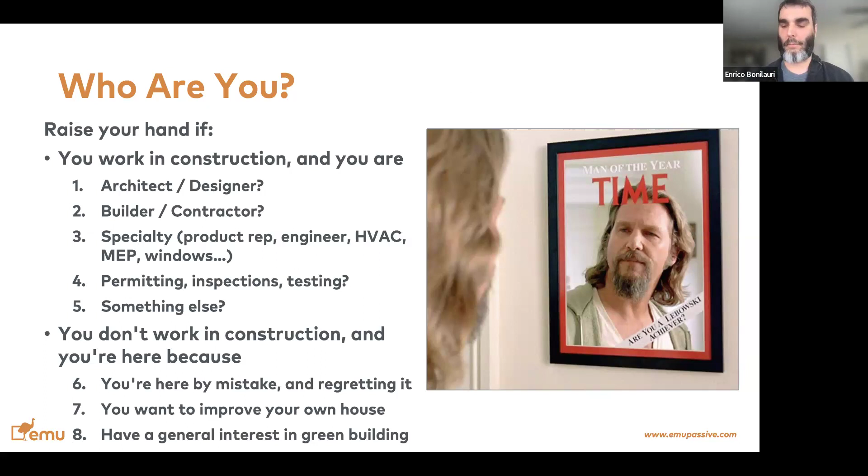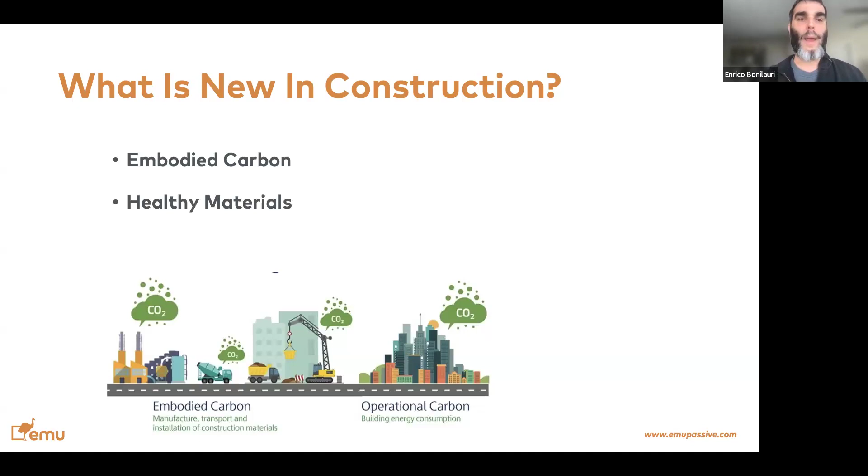So what is new in construction these days? If you've been following the news in construction, you've probably heard a lot about embodied carbon. You may have heard about healthy materials - there's new courses and new research done in materials and toxicity and how that impacts human health.

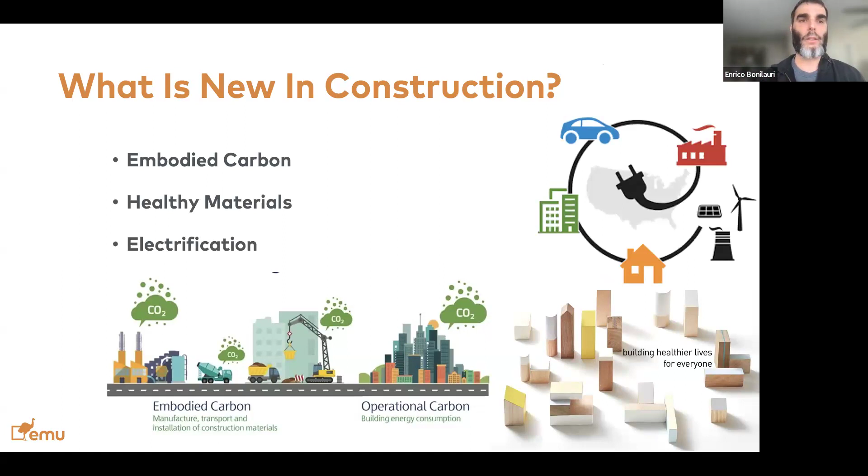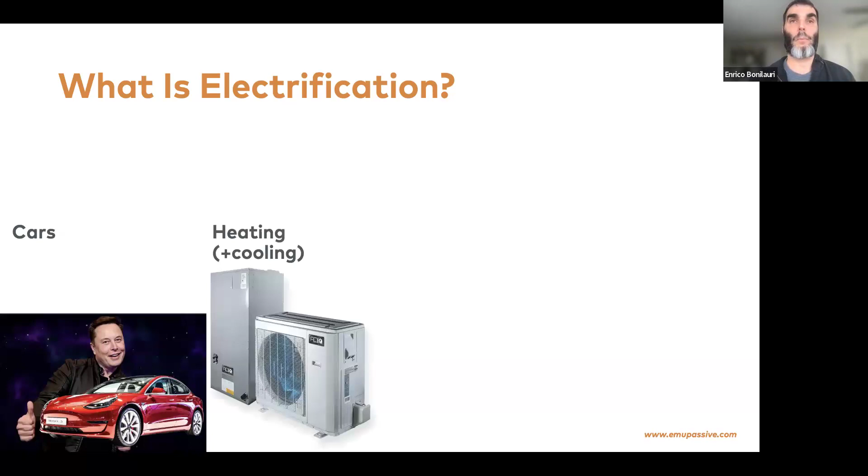As well as electrification. Electrification is bringing not just buildings, but also vehicles and other industries towards the one vector of electricity. And today we're going to talk more about electrification. What is electrification? I just mentioned that cars are becoming electric. Your heating system may be becoming electric, as well as your cooking or your domestic hot water. So why do we care about electrification? Any idea, any thoughts about that?

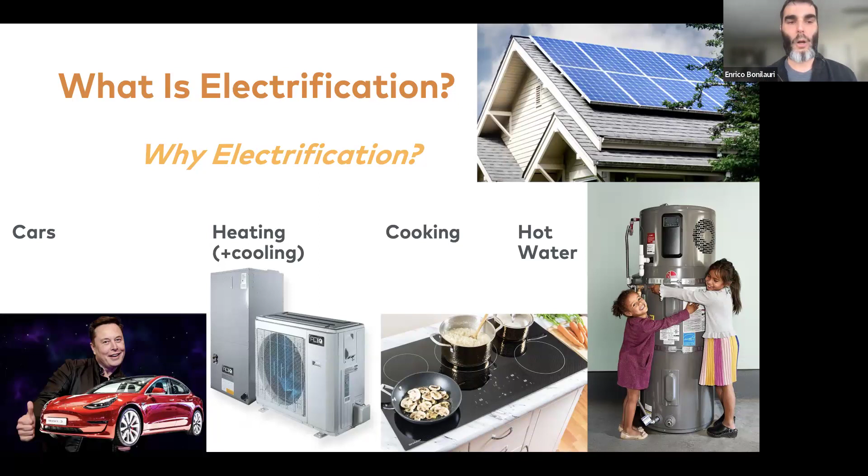In teaching, I've learned the value of open-ended questions. And one of the main reasons why we care about electrification is because if we electrify our buildings and our vehicles, then we can use renewable energy and move away from fossil fuels. So that is one of the main reasons why there's so much push towards electrification, not just in construction, but also in cooking, in cars, and other sectors of our lives.

So raise your hand, or put an X or whatever in the chat, if you own a heat pump. Do you own a heat pump? Please put an X or raise your hand in the chat.

Let me see, we have a few questions. So for those who answered no, do you own a fridge?

Because a fridge is a heat pump. We make this analogy just to remove some of the fear around heat pumps that a lot of builders as well as owners have about this new technology, which is actually not new. If you think of a fridge, it has a compressor that steals heat from inside the fridge and dumps it to the back of the fridge. That phenomenon is called the heat pump.

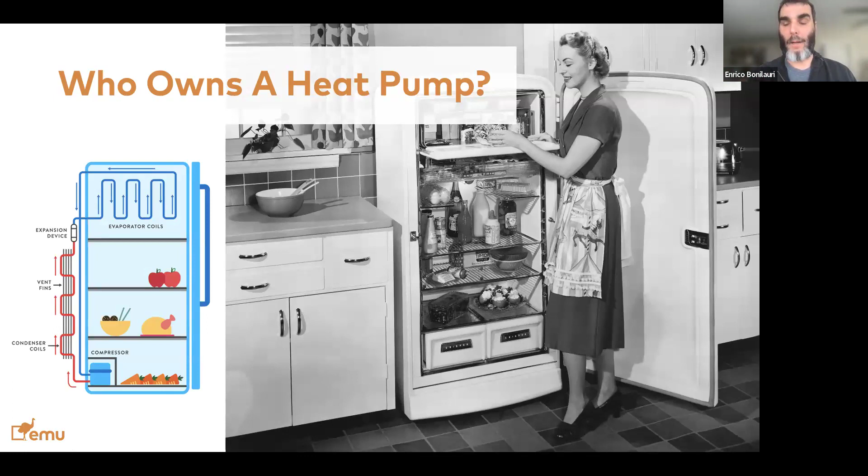So when we have buildings, we have a device similar to the fridge, a compressor that takes heat from the exterior air when it is heating season and dumps it to the inside to provide heating. And we care about that.

So imagine you give $1 to Joe, and Joe gives you $2, $3, or $4 back for the $1. It's a good deal, so it's a very efficient system because it provides you with more energy than what you supply it with. And that energy comes from the exterior air for an air source heat pump, comes from the ground for a ground source heat pump, or comes from the room the heat pump is installed in, in the case of the heat pump water heater.

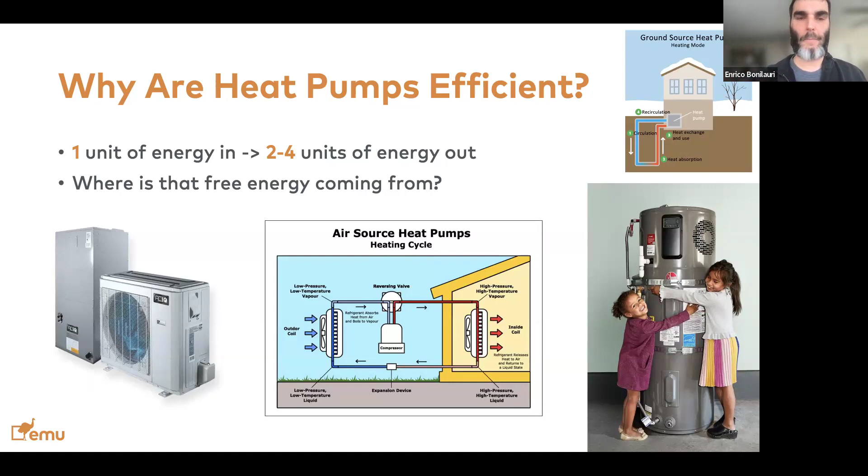So just looking at prioritizing your effort, it's always important to not neglect the efficiency of the building envelope, so the level of insulation, air sealing, and windows, because even if we switch to heat pumps, they are not that efficient in producing heating. They are more efficient in producing cooling. So that is something to keep in mind.

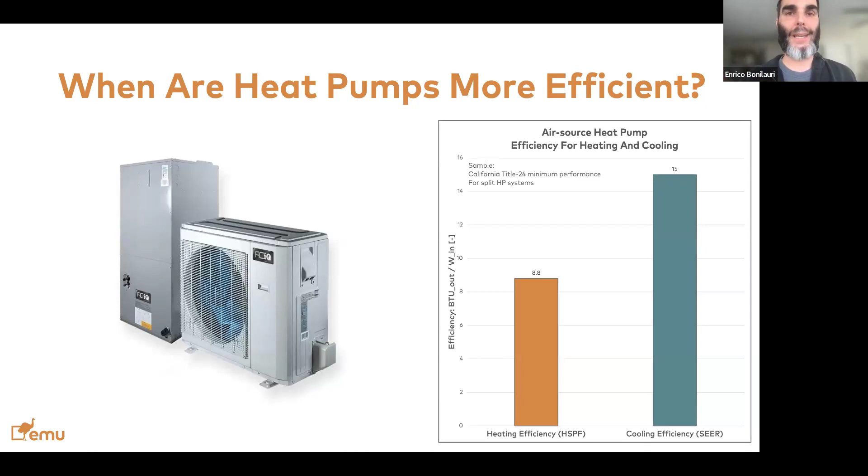In life, I really care about the time of day you run your toaster. That's a joke, but it's also not a joke, because in using renewables, the time of day we use energy becomes more sensitive.

If you're trying to offset your energy to get to net zero in an all-electric scenario, your heat pump producing cooling is working during the day at the same time your PV system is producing electricity, which is a very convenient deal. Whereas in wintertime, your heat pump has to work producing heating, which is less efficient than producing cooling, and it does that at night. There is no sun at night, so if you have PVs on your roof, they are not active at night.

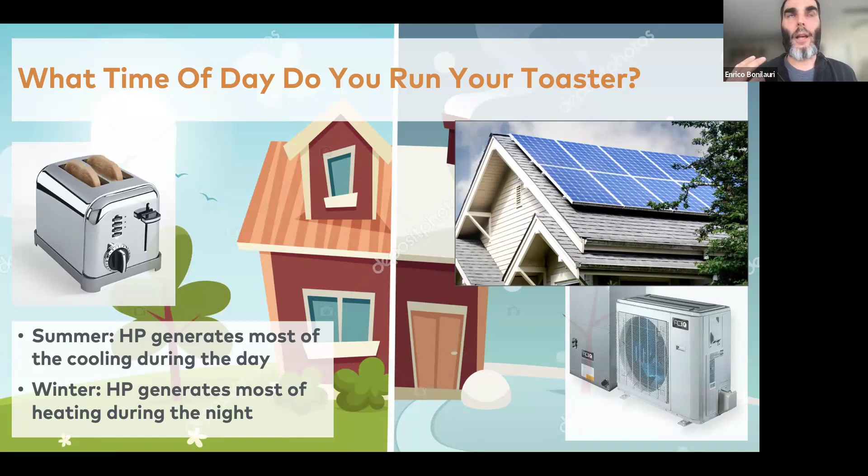So in trying to be smart about getting to net zero, you want to factor this in, because if you don't, you end up using a lot of electricity from the grid, and the grid is very carbon intensive across the country. You may have the perception of doing an awesome job because you've switched to a heat pump, but you're actually drawing a lot more electricity during the night in wintertime, and getting a lot more carbon-intensive electricity from your grid.

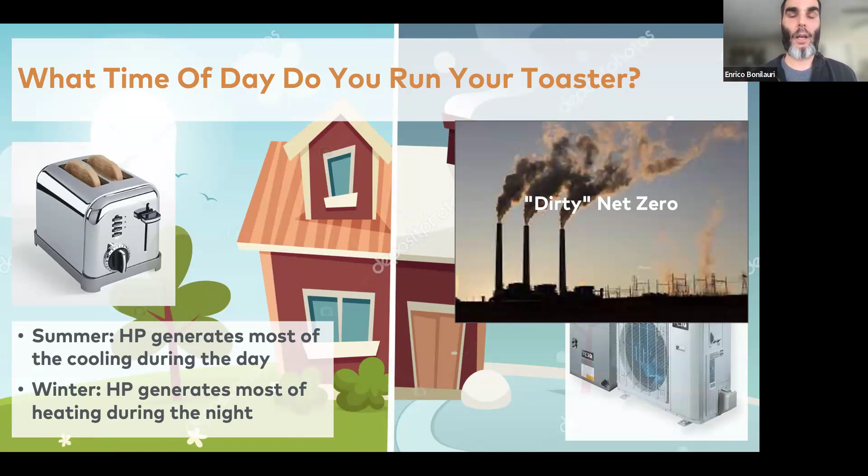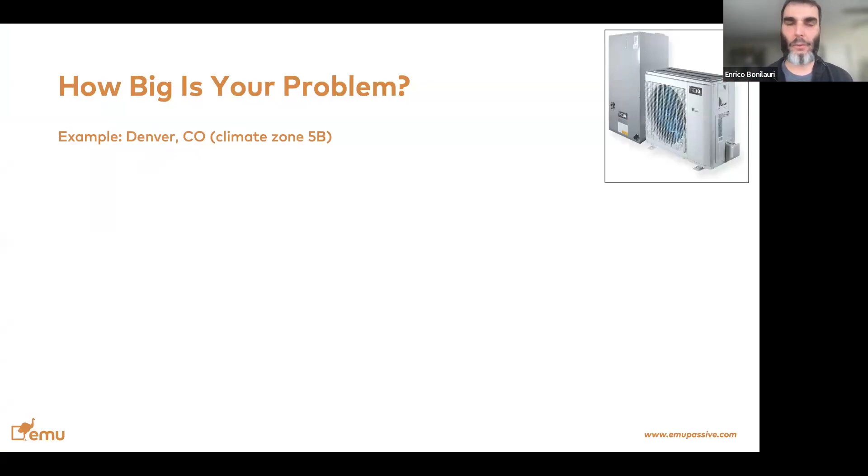Playing more on that, I put together a couple of examples based in Denver, a pretty similar climate—clearly more dry, but temperature-wise similar to Boston. This is an example of a new construction house. This is actually a passive house, but I'm just using it as an example of new construction.

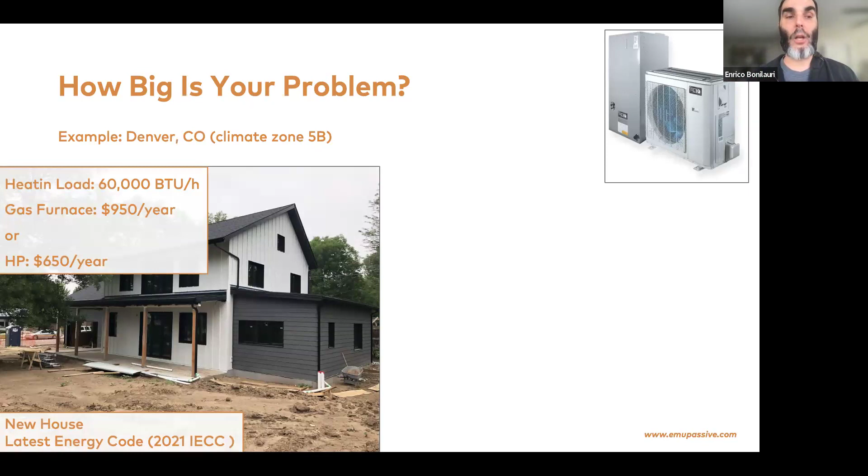If this is built to the latest energy code instead of passive house, the heating load is about 60,000 BTU per hour. To cover that in a typical year with a gas furnace will be about $900 to $1,000 in Denver with Denver energy prices, whereas with a heat pump, it's about $600 or $700 a year. So you save some money just switching from natural gas to a heat pump.

In a retrofit—this is actually a passive house retrofit project, but we're using it as an example of an existing building, a 1980s house with zero improvement to the envelope—if you're just switching to a heat pump, your heating load is about 250,000 BTUs per hour. Heating that with a gas furnace is about $2,800 to $3,000 a year, whereas with a heat pump, you save about $1,000 a year because the heat pump is more efficient.

So this is a normal scenario in climate zone 5, Denver: new construction built to the regular 2021 energy code, as opposed to the existing building from the 80s without any improvement to the windows or additional insulation, just as is, switching from a gas furnace to a heat pump.

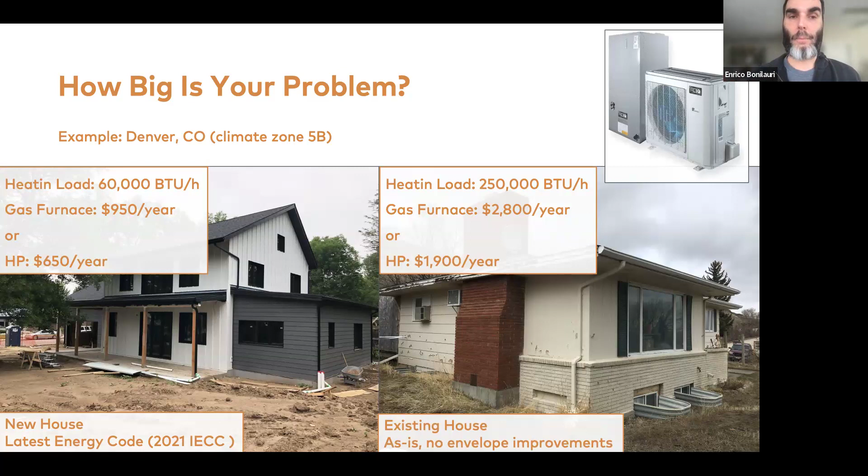Now, the problem is much bigger when you have extreme weather events. In Denver this year, we had a polar vortex where for 84 consecutive hours, Denver was below zero. For those not familiar with Denver, that very rarely happens—it's pretty sunny, it may drop down to 10 degrees, but 84 consecutive hours is pretty extreme. That put a lot of heat pumps out of order. One of the issues with heat pumps is that we're talking about air source heat pumps.

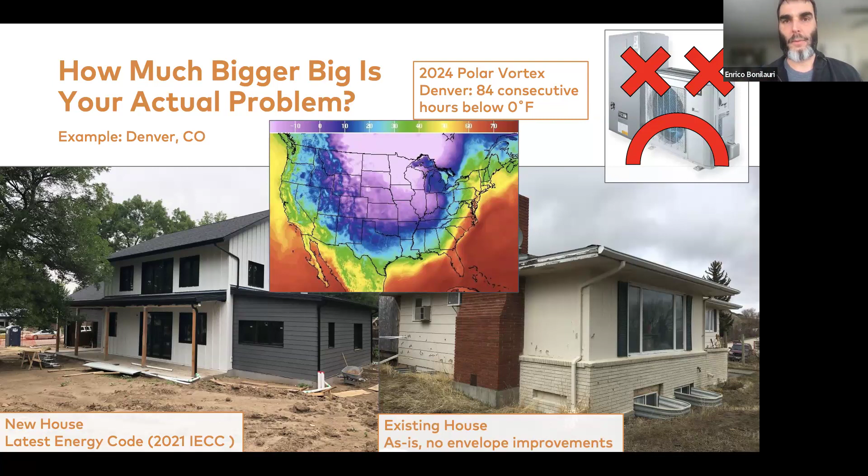It takes heat from the exterior air, and if that exterior air is too cold, then that heat pump cannot work. Now, there are some cold climate heat pumps, and you want to be very cautious about selecting a good one, because there are also a lot of supposedly cold climate heat pumps that are not high performance.

So they shut off or they become very inefficient. And when they shut off, the alternative is to have either a furnace, a regular furnace backup, which is probably most cost effective, or as we're showing in this case, a full electric backup—just a big electric resistance in your ductwork to heat up that air instead of the heat pump.

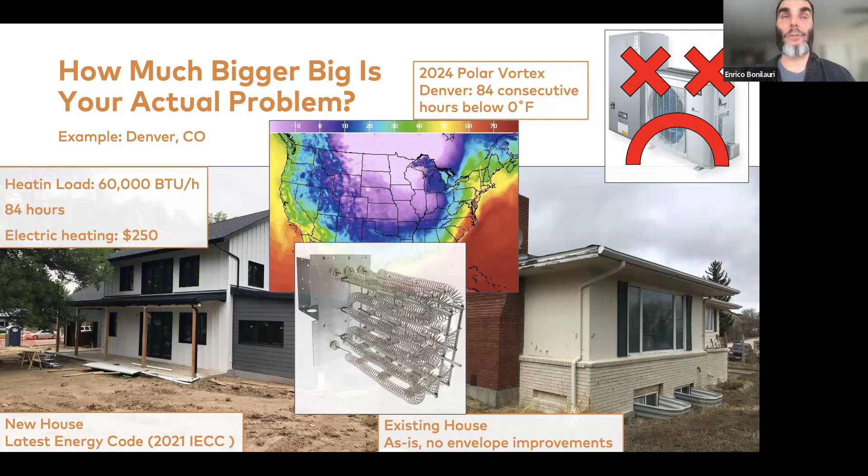And if you do that for a new house, over just 84 hours, it's going to be about $200 or $300 of extra electricity bills because an electric resistance is very inefficient. And for a regular house, 1980s, no improvement on windows or insulation, if you're switching to electric resistance heating, over 84 hours only, it can be $1,000 of additional energy bill.

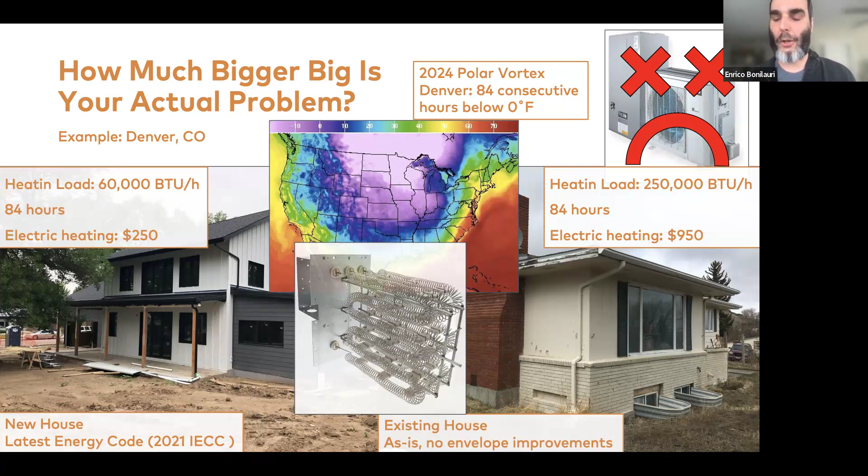So this is something you want to be very cautious about, because if you're switching to all electric, you want to make sure your heat pump actually can endure cold temperatures. Otherwise, you're exposing yourself to being either out of heating or having very expensive energy bills. This is just to put some cautions in your action moving towards all electric.

Then what is next in construction? We talked about electrification, we talked about healthy buildings, we talked about embodied carbon. And actually what I see next in the context of construction is this guy trying to sell us electric cars.

We are living in one economy with one grid and one market. So the fact that electric vehicles are becoming more and more popular is something that is going to impact the construction industry as much as other sectors. And we care about that because there's going to be one energy bill, and this is going to be our lives in the next 5 to 10 years.

So how does an EV compare to a house in terms of energy consumption? Have you ever tried to ask that or find that out?

By the way, in the newest and latest definition of net zero building, the charging of electric vehicles at home does fall under the umbrella of the energy that you have to offset for your building to be called a net zero building. So moving forward, if your city requires buildings to be net zero, it is on the horizon for that net zero balance to also include charging of electric vehicles. So that is something we need to keep in mind, because it's coming. It may be 5 years out, but this is the direction the whole market is going.

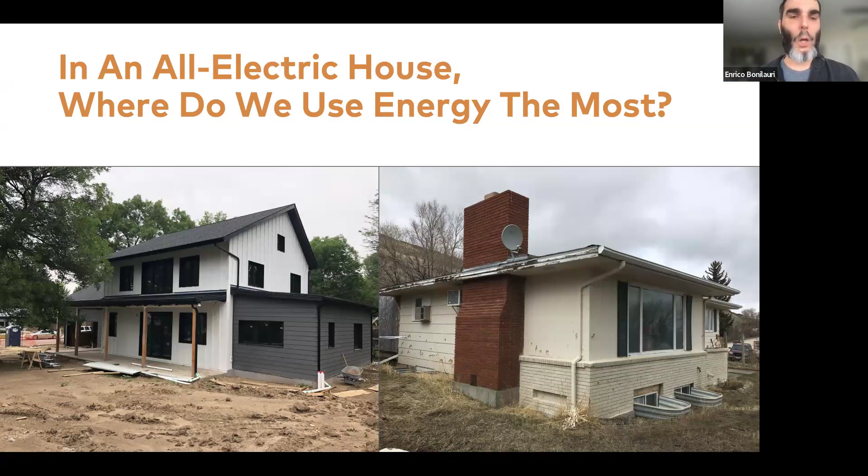So we looked at the new house, 2021 code compliant, on the left, and the regular house without any improvements. We did a breakdown for the as-is, and on the left-hand side, the new build, 2/3 of the energy—the solid orange—is actually the heating. The 3.9%, the dashed white and yellow line, is the additional heating due to the heat pump water heater—the water heater that takes heat from inside the room. And that heat comes from somewhere, and that comes from the heating system.

So this is a line of caution for anyone installing a heat pump water heater: that heating is coming from your heating system. That heat pump water heater becomes just an extension of your heating system. If your existing heating system is not that efficient, your energy bill is going to go up.

Then looking at the breakdown, about 1% is active cooling, about 6 to 7% is domestic hot water, and about 20% is appliances, home appliances, for the new construction. On the right-hand side, we have a similar breakdown, but because it's an existing home, about 75 to 80% is actually heating.

Now, if we look at these, they're just percentages. If we look at the actual numbers, this is what it looks like. So an existing house requires a lot more heating than a new house. Although you'd be surprised how much less energy you can avoid by actually doing much better than code minimum—we're going to talk about that later.

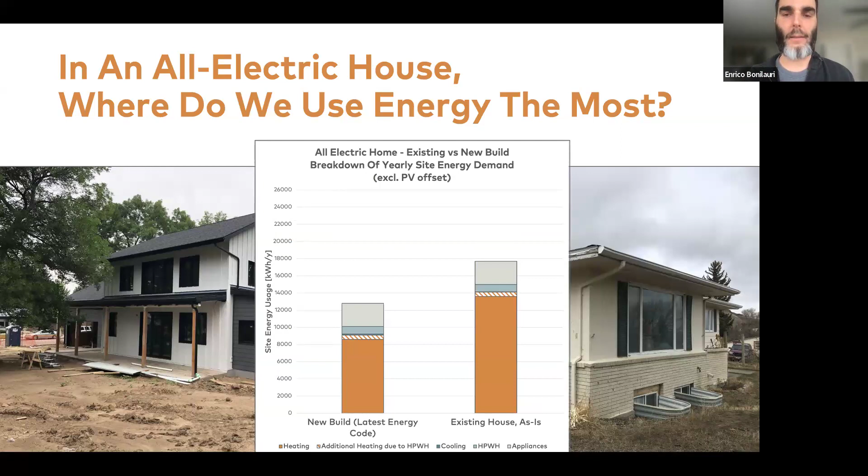Now, what happens when we start adding 2 electric vehicles per house?

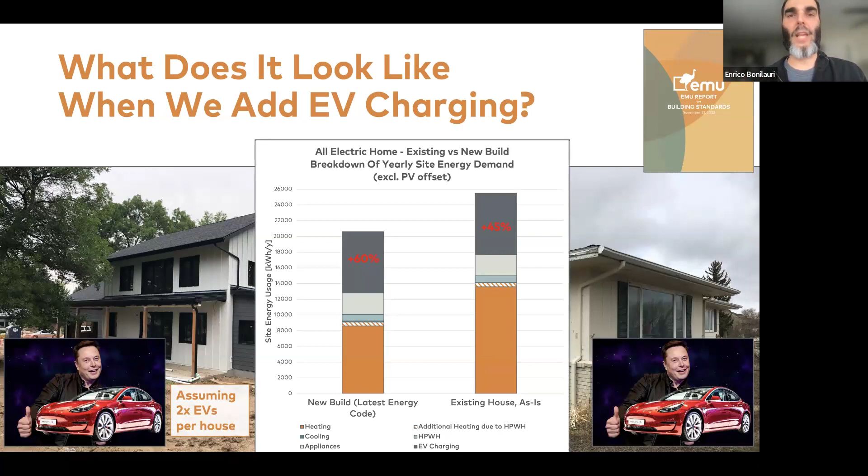Elon here comes to our door and tries to sell us electric cars. Now that energy bill goes up significantly. So this is something we want to keep in mind because this is coming, maybe 5 years out, but this is the direction the whole market is going.

How much PV can you install on your site, either on your roof or in your garden, if your goal or requirement is to get to net zero? There is a limit in how much we can offset the energy we consume at home once we start accounting for electric vehicles on top of buildings. This is something we want to keep in mind when advising our clients.

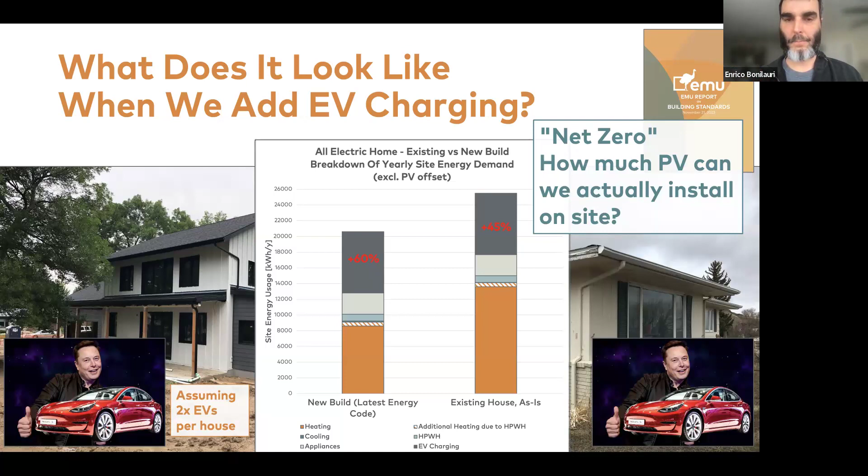Now, how much better or more efficient can we make electric vehicles or buildings compared to today's minimum requirement? Have you ever asked yourself that? I looked into today's EVs and tried to look into tomorrow's EVs, and I didn't find much information about how the technology can be better.

I'm not talking about batteries or how much longer the range can be. I'm talking about how many miles we can get from a kilowatt hour. At the end of the day, with EVs we are moving tons of steel, and that is not efficient to begin with. So unless we start building cars out of carbon fiber or something that doesn't weigh 2 tons, I don't see a ton of improvement in the mileage we get from EVs.

I also did not find much data as far as what is coming next. There's a lot of focus on batteries, but a little less as far as miles per kilowatt hour.

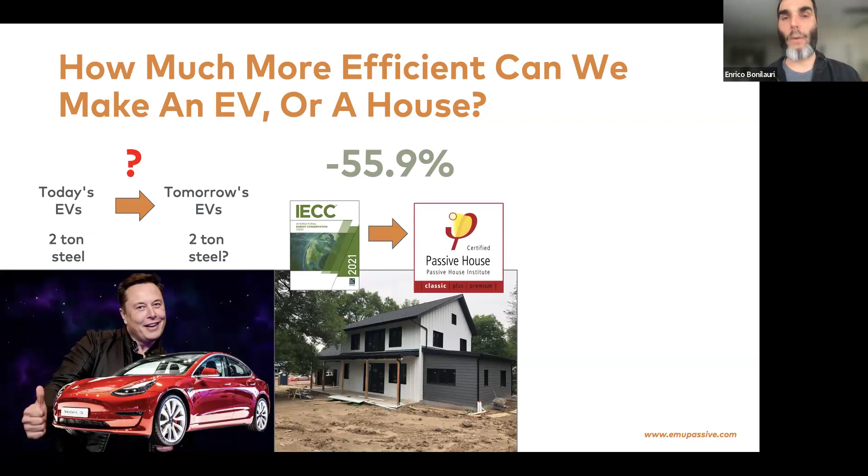Now, for new construction compared to the baseline code, you can reduce the overall site energy demand by over 50% by switching to passive house. This is not just heating and cooling, this is for the overall demand. And for the existing building stock, this is actually our project being retrofitted as an EnerPHit, that can be up to 60% plus. Again, this 55 and 60% is looking at the total site energy demand for domestic hot water, appliances, heating, cooling, and electric vehicles. Once you implement passive house or EnerPHit, you can save up to 50 or 60% compared to the regular building stock.

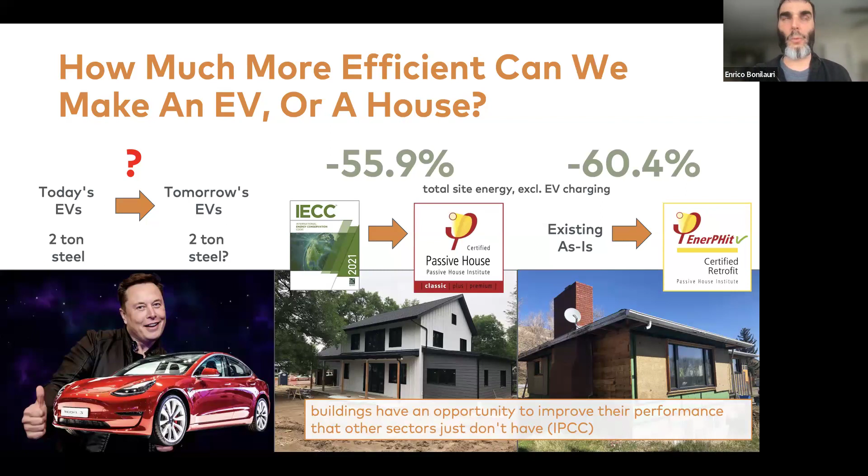One note that came from the Intergovernmental Panel on Climate Change for the construction industry, from the conference in China in 2019, is that the construction industry has dramatically higher potential for improvement compared to other sectors, including transportation and food production. So it's really key for our development as a society that we make buildings better, not just by switching to PVs and heat pumps, but by making them better insulated, better airtight, and with better windows and doors. That is one of the biggest potentials we have as the construction industry.

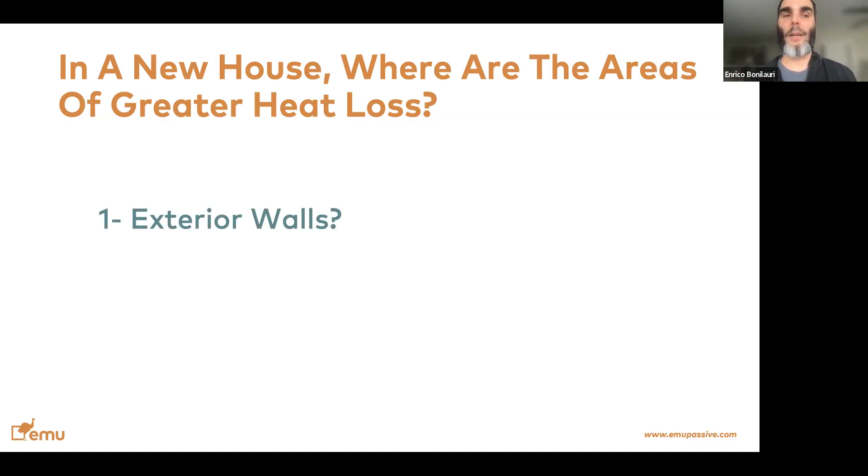Now, we talked about heating being the biggest part for both new construction and existing buildings. Where do you think the greatest areas for heat losses are in a building? This is where I'd like you to type in the chat, so please pay attention. If you believe exterior walls are the greatest source of heat losses, type 1. If you believe the ceiling or roof is the greatest area, type 2.

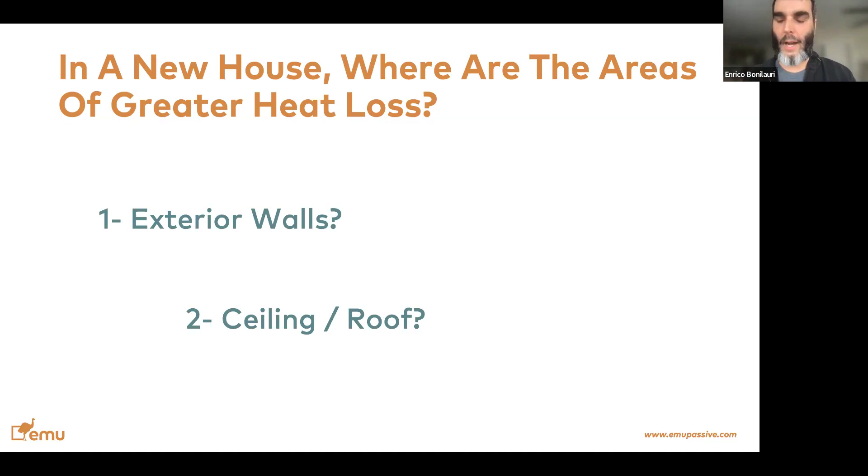Yes, there are considerations about whether it's a two-story building or a ranch—don't care. If you believe the walls are the greatest, type 1. If you believe the ceilings and roof are the greatest area of heat losses, type 2. Air leakage, if you believe that's the greatest area of loss, type 3. Windows and exterior doors, type 4. Doggy doors, type 5 — I am not judging, we have many clients who want efficient doggy doors, we can talk about that, and about unrealistic expectations. Or slab and losses through the ground, type 6.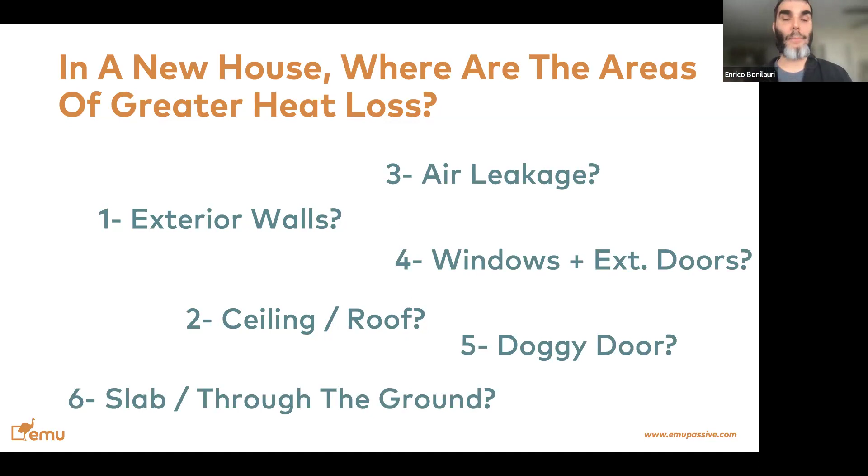This is the choice, you can type different numbers if you'd like, but this is where I try to get the sense. So we get some, let me see — air leakage seems to be popular, doggy door doesn't seem to be. If you saw a doggy door you would type 5 in a heartbeat. Mail slot, I would use that in the next one. Thank you, Steve.

Good, thank you for the feedback. We can talk more about that in a second. And I don't know, because I don't know which buildings we're talking about.

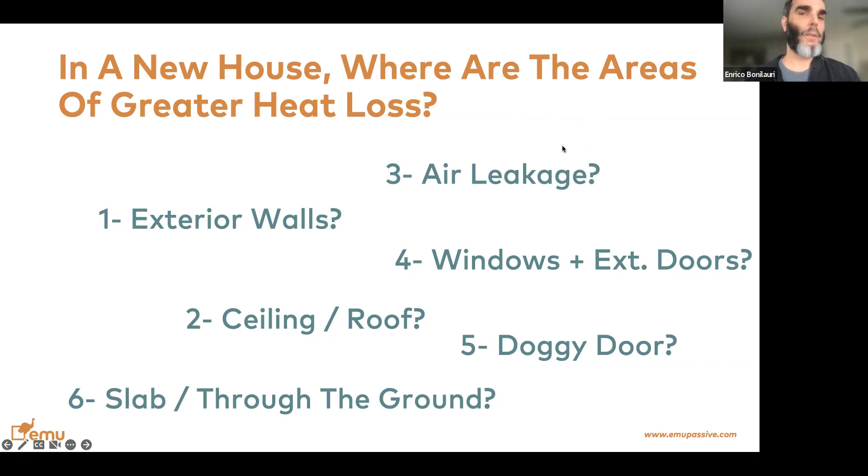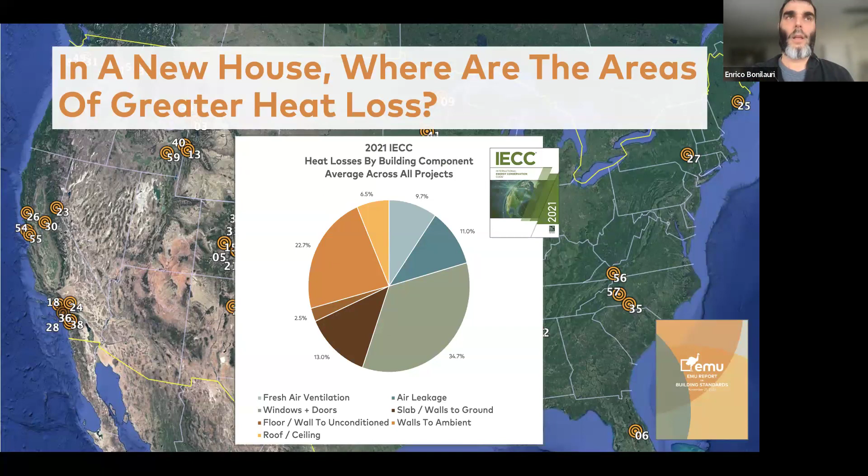To answer that question, we developed a study, available for free download — there's a QR code at the end of this presentation if you're interested — where we looked at 50 different single-family projects across different climate zones to answer this question and many others. These are single-family home new construction projects, built to comply with the 2021 Energy Code, and the number one area of heat losses is windows and exterior doors, by far.

Over a third, more than one-third, of the heat losses on average across 50 projects in different climate zones, is from exterior doors and windows, excluding air leaks. We're going to see what that means in just a sec. The second biggest source is exterior walls. Third is losses through the ground to the outside air. And fourth, all of the air leakage combined of the building.

So in trying to promote building science, we developed this research. We'll see a QR code at the end where you can download the report. But in trying to prioritize where to put effort, clearly air sealing your building is low-hanging fruit, and it's important, but it only addresses about 10% of the heat losses in your building.

A third is exterior doors and windows, we'll see more about that. And then something that blows people's minds is heat losses to the ground.

Towards the end of this presentation we show this, but it's also available on YouTube. If you go to YouTube and type EMU Passive, the latest video we published is about heat losses to the ground, which is one of the areas most disregarded by construction professionals across the country.

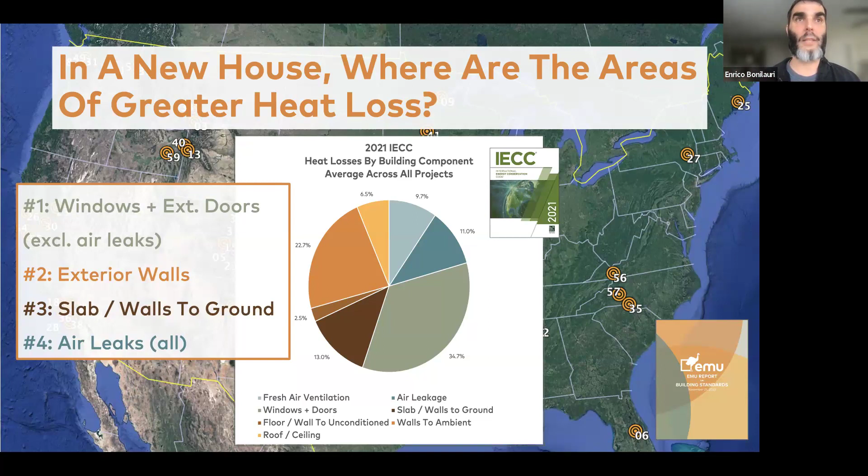This is the average over 50 different projects. Some had basements, some did not. Some had a conditioned crawl space, some had unconditioned crawl spaces. It's a mixture of 50 actual projects, and I'm happy to answer more questions about this later. But statistically speaking, heat losses through the ground cause more losses than air leakage, which comes as mind-blowing information to a lot of builders today.

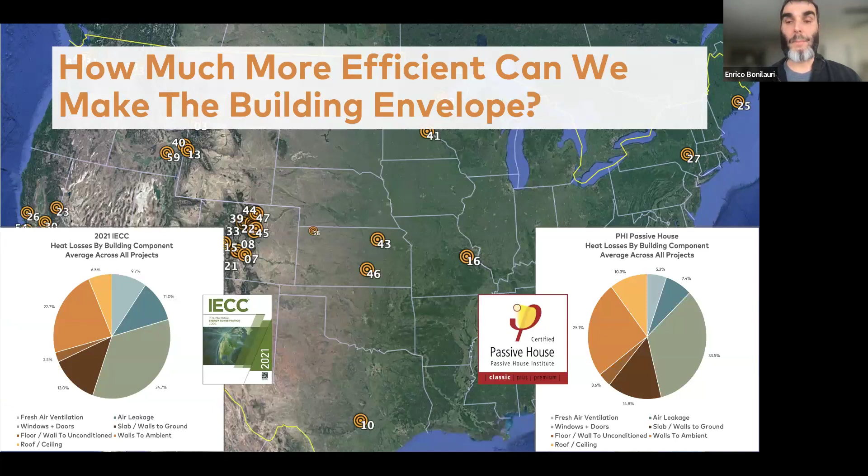Now, if you compare this breakdown to the breakdown we'd get if those 50 projects were built to the passive house level, the breakdown is actually pretty similar. Number one is still windows, number two is still exterior walls, number three is still heat losses to the ground, and so on. The difference is that the absolute amounts are much less in passive house, because we insulate more, air seal more, and have much better windows and doors. But that breakdown is still the same, and losses through exterior windows and doors is still number one.

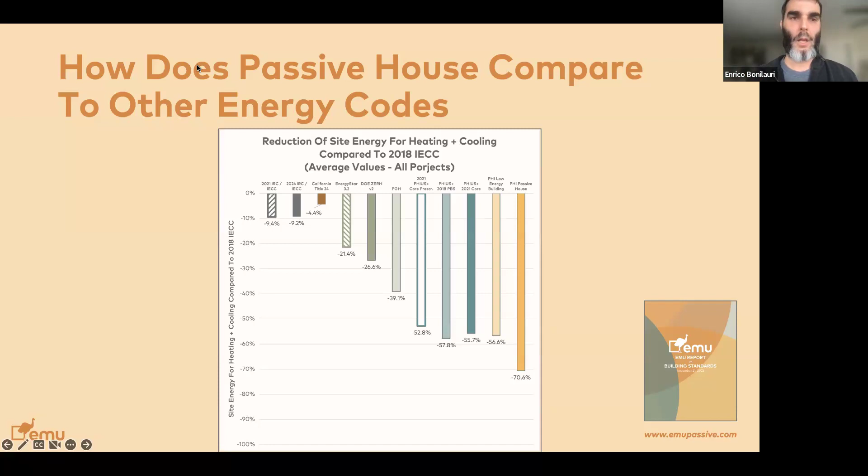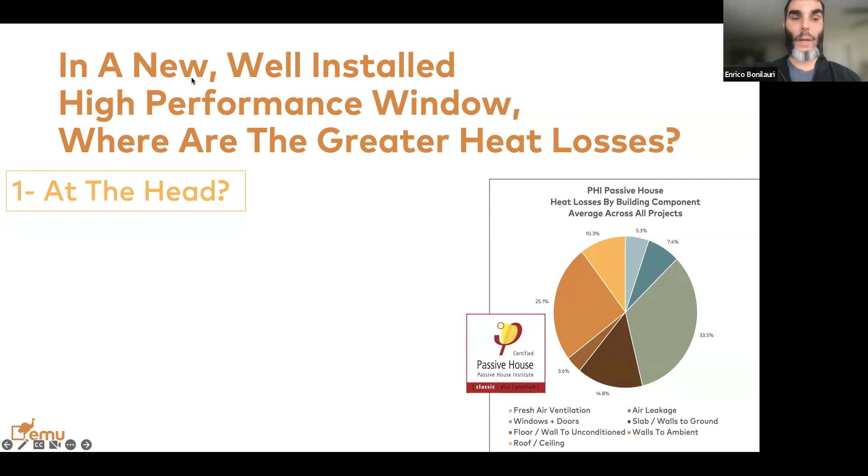Now, back to the breakdown: we saw that over a third of all losses were through the windows. So ask yourself, in a new, well-installed high-performance window, where do you see the greatest heat losses? Wait and type in the chat: type 1 if you think the greatest heat losses are at the head of the window, type 2 if you think it's at the jamb, type 3 if it's at the sill, and 4 if you think the greatest heat losses are through the glass.

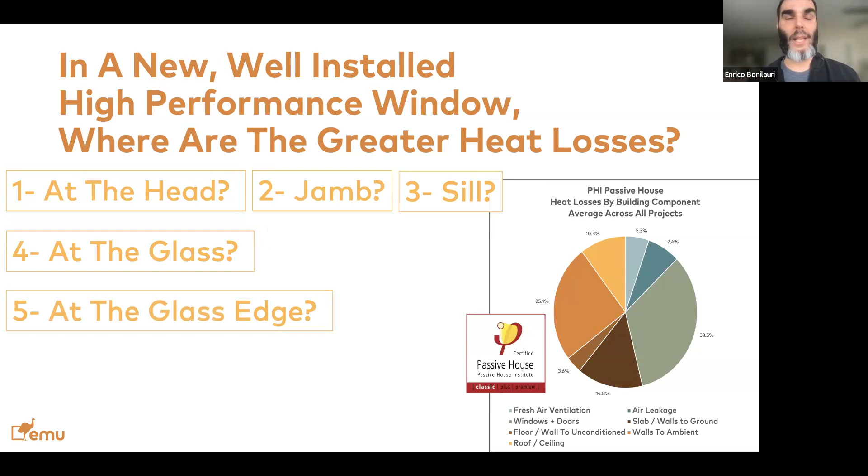Type 5 if you think the greatest losses are at the glass edge, meaning the connection between the glass and the window frame. Or 6 if the greatest heat losses are through the window frame. Or 7 if you think it's air leaks. This is a new, well-installed high-performance window. Please type in your numbers and we can chat.

So I see, let me see. I see some sixes, so window frame. I see some glass. I see some fives. Okay good, good, awesome. I see a seven. Awesome, and I see, okay, more sevens. Cool, thank you for that.

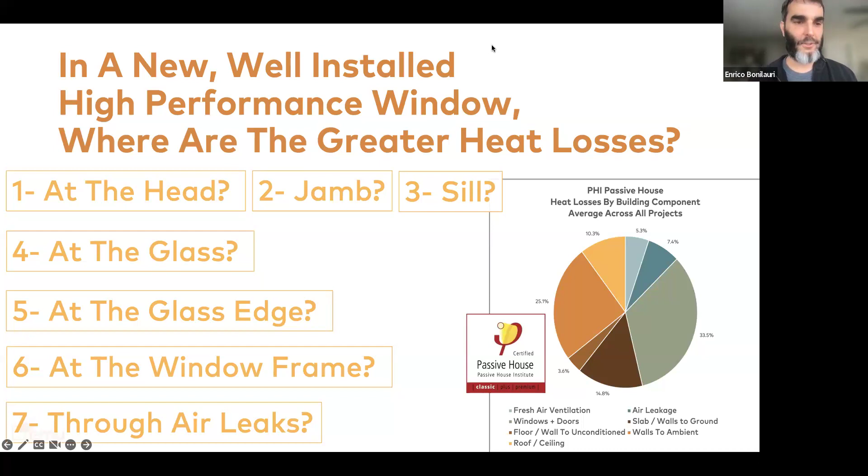That is always good to have this chat. We took a high performance window and modeled it, and we also included the testing results for air leakage, and this is what we found. So if you read the pie chart with me, the biggest wedge is the big dark blue at the bottom, which is losses through the frame, just conduction losses to the frame. This is a high performance window with a triple pane. You see the cutout, you see the window frame has insulation inserts inside the frame. Even though it has insulation inserts and the frame is only on the sides, there are more heat losses through the frame of the window than we have through the glass, which is the light blue color there.

Then, number 3 is the dark brown, which is the thermal bridging between the window frame and the wall. We're going to see a little bit more about that. The fourth one is thermal bridging again between the frame and the glass itself. Then the air leakage, the total air leakage is around 2% of the total heat losses. I'm going to say it again: in a high performance, well-installed window, the heat losses through air leakage is only about 2% of the total heat losses. I'm saying that because in conversations we have over and over with our builders, there's an equation in the mind of builders: window equals air leaks, and everything else is disregarded. So if you look at it in the context of everything else, air leaks is actually only 2% of the total heat losses. This is very important because it drives your conversation about which product to select.

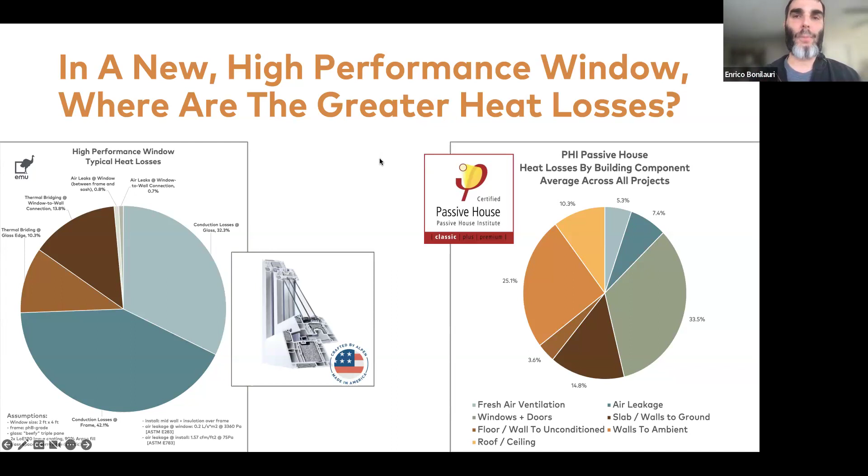So this is a window install detail at the head. I wanted to have it large so you can see some details. You can see it's the same window, so you see the insulation inserts. This is installed on a wall with about 4 inches of exterior insulation. You see in this detail the exterior is on the left-hand side and the interior is on the right-hand side. You see the drywall, the darker gray is cellulose insulation, the brown is the headers, then you have your sheathing, and then the exterior mineral wool insulation.

This is a high performance install where the window is in the middle of the wall. There's another video on our YouTube channel that talks about positioning the window in the wall thickness and why the performance of the window is best in the middle of the wall, because in this optimized condition, the heat losses of the thermal bridging, which is the dark brown wedge on the left-hand side, account for about 14%. So 1 in 7 losses through that window are just because of the install detail. This isn't about poor install, it's just the way the detail is designed and executed for the insulation.

You also notice that we have insulation extending over the exterior of the frame of the window. The reason for that is once we start looking at the heat flow, you see there's a lot of bypass effect around the frame, and the frame is one of the areas with greatest heat losses. So we want to add some additional R-value over that frame. This is a way to make your windows perform better, and performing better means higher comfort as well as being more energy efficient. So conduction through glass, conduction through the frame.

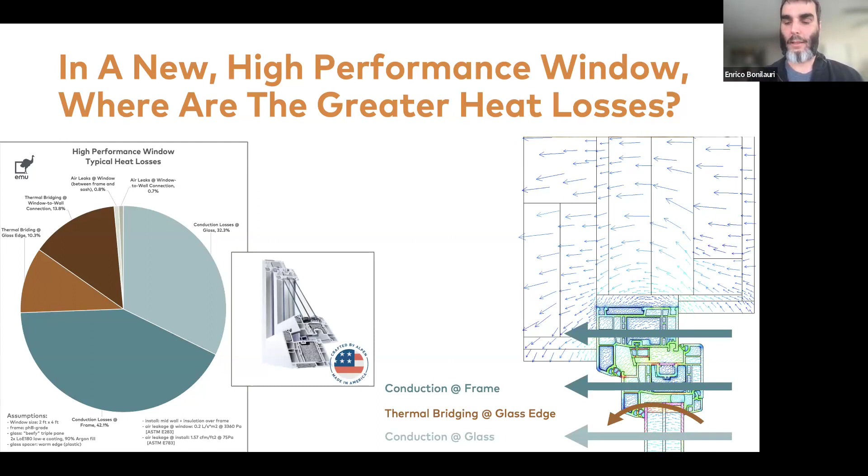This is the thermal bridging at the glass edge that I referenced on the left-hand side. Then we have the thermal bridging at the window-to-wall connection. This is very big, which is why we want that additional insulation over the window frame. Then we have air leaks at the window itself. In this case, it's an operable tilt and turn window.

So the leaks happen between the sash and the frame of the window, and then air leaks at the connection between the window and the wall. This is all based on lab and field data.

But to give you context of how much air leaks matter, as opposed to just having a good window. There's a lot of conversation on the internet about air sealing windows, but the window you're air sealing is actually pretty low performance. So you're still getting a pretty low comfort level, even though you air seal very well, because that window is very poor performing.

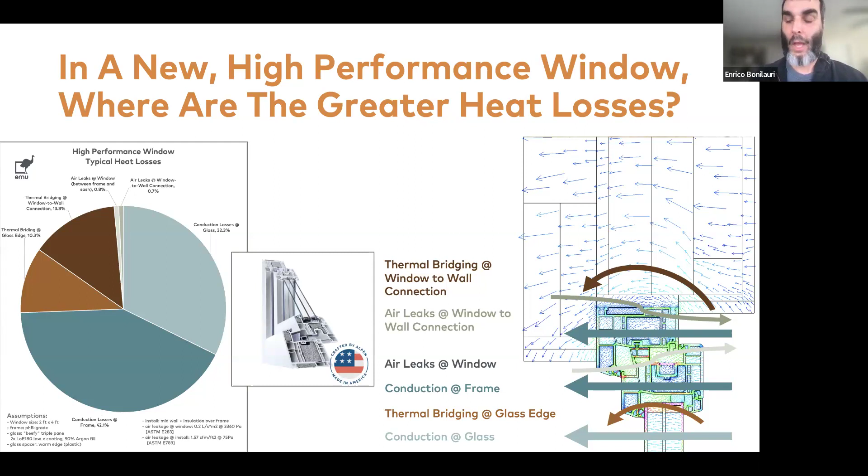So you're going to have a very uncomfortable building in the first place, which leads me to asking: why do we care about windows? I kind of gave it away. But this is what we get. This is a brewery in Colorado that effectively lost business because of how uncomfortable it was.

I love beer - that was my beer glass, and I could not sit next to that 39-degree temperature window pane because it was so incredibly cold. So they effectively lost the sale of at least 2 beers because I had to leave, it was so uncomfortable.

And that is normal, as it is normal to have ice forming on the inside of the glass. This is my office in the house I used to live in before, in the Denver area. One day I was just working at my desk and I had ice forming in front of me. This is a building that is less than 10 years old.

And as a naive person in the 21st century, what I did was post a picture of this on the internet. I got so much shit on LinkedIn from fenestration professionals, people that work every day making windows. They assume that the ice is absolutely normal. And I'm like, maybe we speak a different language - in my world, we should not have ice forming on the inside of windows.

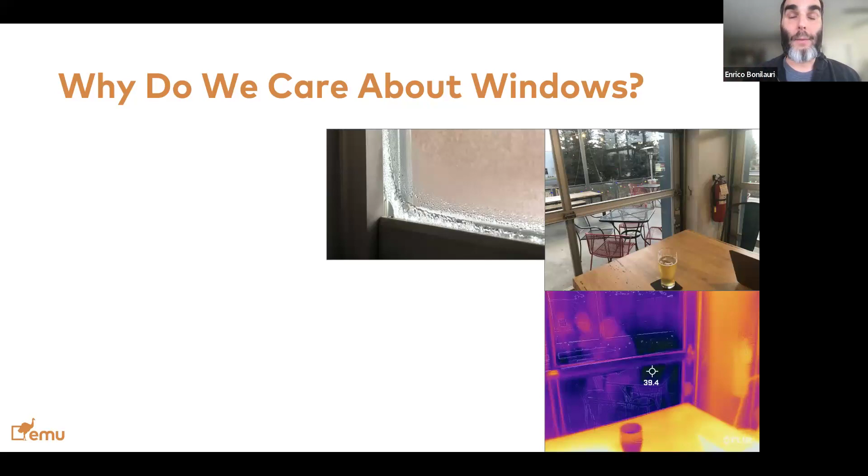So if you're thinking about what building codes deliver, that is not comfort. These buildings depicted here comply with local energy codes. So if you're thinking energy codes are a way to deliver thermally comfortable buildings, this is not it. As it is not it for indoor air quality.

So this is something I'm happy to talk more about. If you're trying to convince your clients to choose higher performance windows - they don't care about energy, they don't care about U values, they don't care about passive solar gains. They care about comfort. The way to talk about windows is thermal comfort.

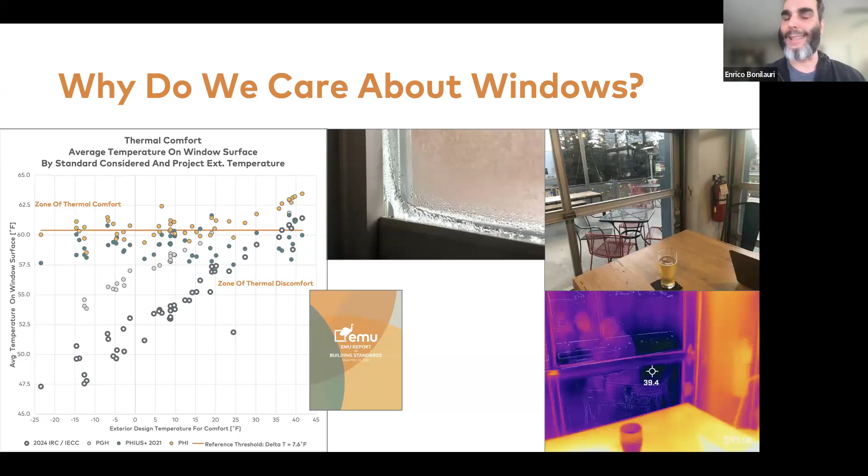Show them this picture of the ice forming inside the window. Show them this picture with the infrared camera and the story about me not wanting to have more beer. People care about comfort, and windows are a key component to delivering that. And the energy code is failing miserably at delivering that.

And this is - even though a window is triple glazed, that typically means very little, because they may have a very low performing triple glaze. You may pay the premium for it, but you don't get the performance, you don't get the comfort.

This is an area where you want to be cautious, because just saying something is triple glazed is not enough. Most mainstream manufacturers have triple glaze, but it's very low performing, to the point that their double pane glass performs better than their triple pane glass. But they sell you the triple pane glass, and if you don't know, you pay the premium thinking you're going to get better performance, and you don't. So be cautious about that.

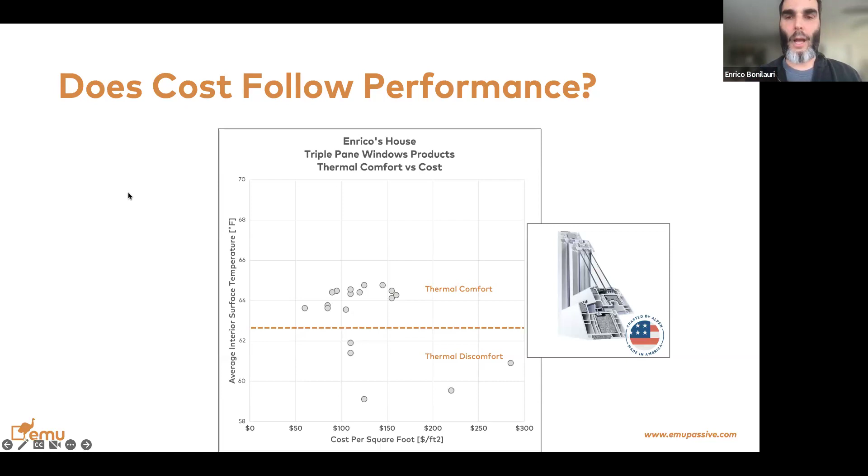Why do we care about buildings? Taking a step back, we talked so much about windows, but also about buildings. Why do we care?

One of my favorite quotations is from this picture. See if it comes up. How much time do you think we spend inside buildings? It's about 90% plus of our lives. So the quality of buildings we live in has a direct impact on our well-being and health.

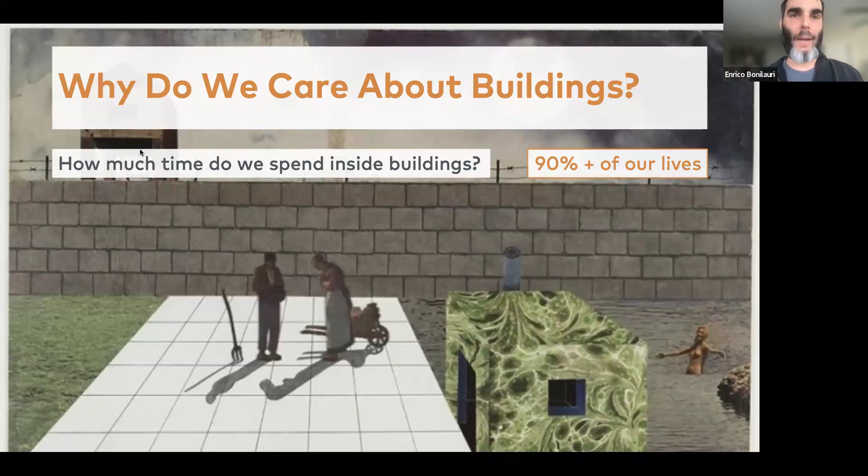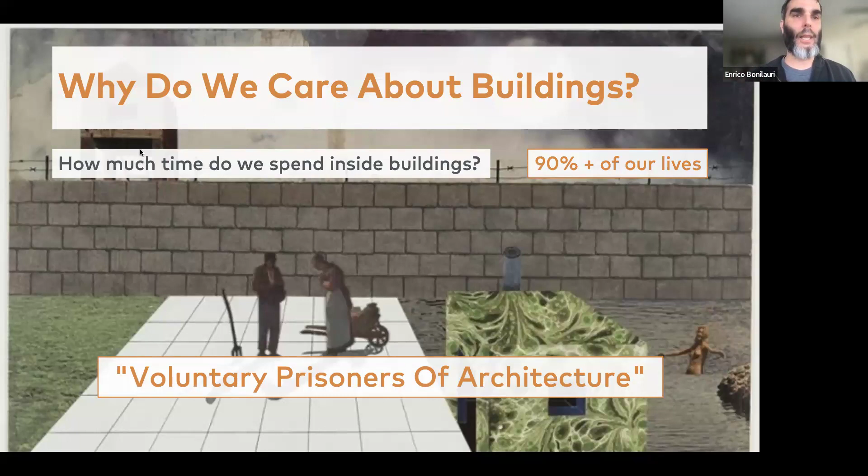This quotation is from Rem Koolhaas, who in the 70s came up with the concept of voluntary prisoners of architecture. If you think about it, there's no law that forces us to stay in our homes. But our homes are not necessarily healthy or comfortable, so we are voluntary prisoners inside these man-made boxes.

Why do we care about buildings? Because we spend most of our lives inside them. So it makes no sense in my mind to have buildings that are more energy efficient and less healthy.

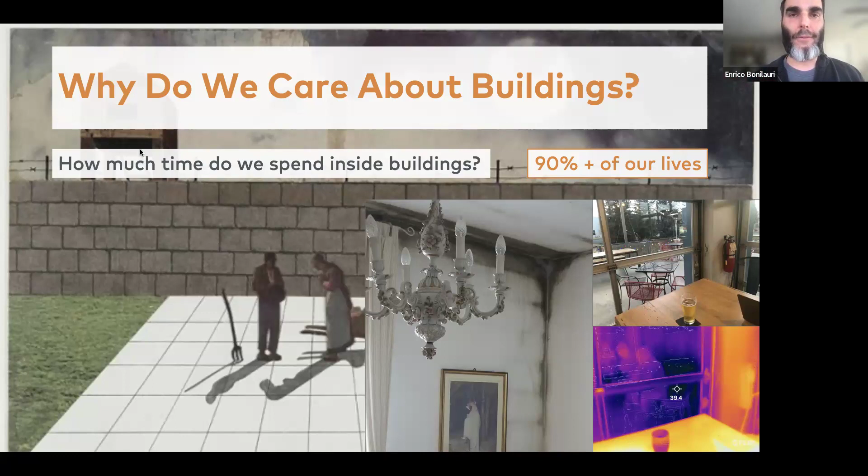This is a building I used to live in, brand new, less than 10 years old. To get fresh air, I had to manually open windows, meaning I had to trade off thermal comfort—the room would get cold—to get higher indoor air quality looking at just CO2. But then particulate matter, the pollution, would also come in with the exterior air.

So it was a struggle. It's a way to show that unless you think about indoor air quality from the get-go, if it's an afterthought, it's going to be a struggle to deliver that, because it needs to be addressed from the beginning of the project with a continuous fresh air ventilation system.

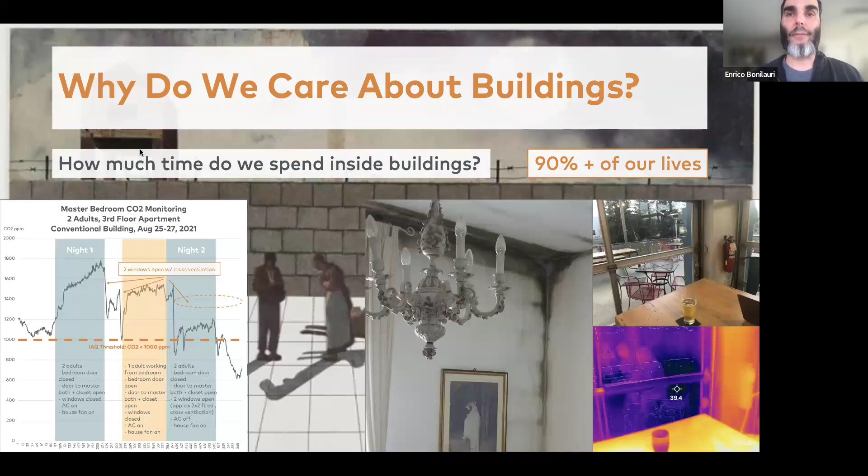Now, this is a question I love asking people in class because it tells us a lot about the industry. How long does a family stay in a house they just moved into before they move out again? A new family goes into a new house—how long do you think they'll stay? How many years before they move out again? Please type it in the chat.

Let me see, I see some 4, some 7. Awesome, anyone else? 15, okay. 7, okay cool. So this is me asking, is it 7 years? Is it 25 years? Is it 5 years? Or are years just numbers?

So how long have you lived in the house you live in right now? Please type it in the chat. Planned for 3, ended up at 10, 13, 13, 4, 9, 30. Awesome. Less than 1, okay. Me, 2. Awesome. So look, this is data, we want to see data.

For NAHB, National Association of Home Builders, that doesn't give a crap about building better, the average nationally is 13 years. It has been 13 years for the past 10 consecutive years. If you think the average is 7 years or 5 years, you're thinking of the market before the 2008 bust, which was 16 years ago. Now, in advising your clients and making recommendations, it's key to have this in mind. People on average are going to stay in that house for 13 years or longer because interest rates now are so high—nobody's going to move out that quickly. This is key to having context to advise your clients with.

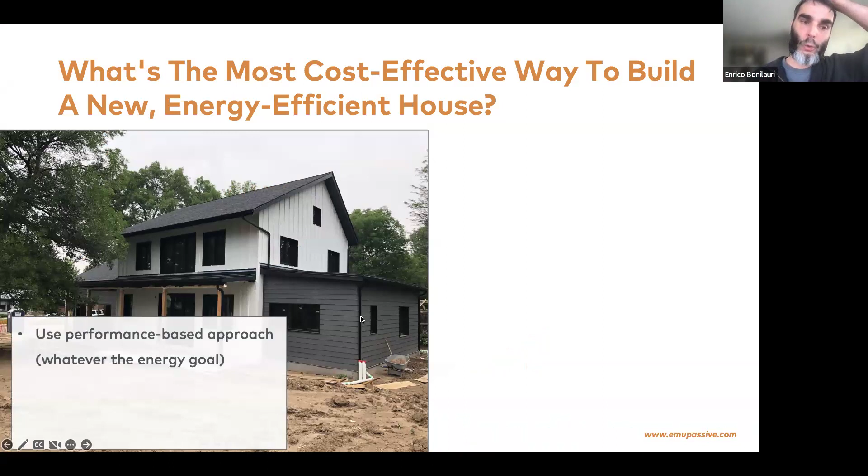So, speeding up a little bit, what's the most cost-effective way to build a new energy-efficient house? What we recommend is to use a performance-based approach, whichever the energy goal, and then do an energy analysis early on in the design, typically the schematic design, because that helps you navigate priorities based on your climate, based on your project, and make decisions with the handrail of data to know what you're doing.

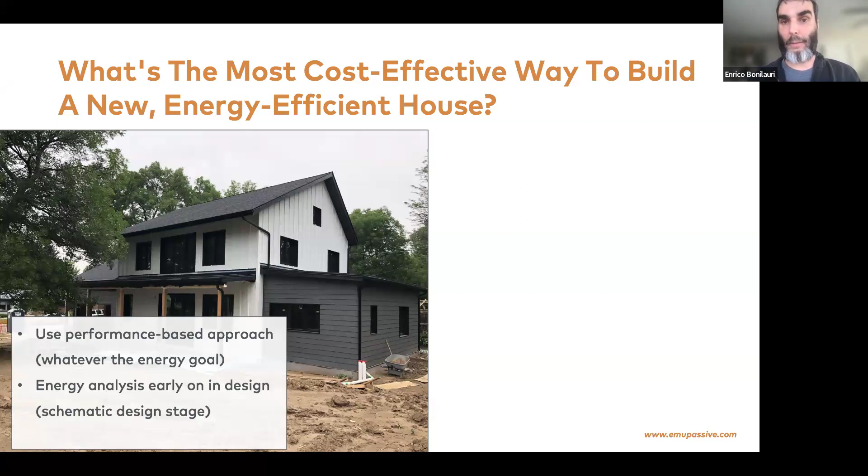As part of the same study, which we'll have a QR code for at the end, we compared a performance-based building standard, the PHI low energy building, and a prescriptive standard, the Phius 2021 core prescriptive. So we basically compared a performance-based path and a prescriptive path for a project that would get within 20% of each other for the energy performance. One path is prescriptive and the other path is performance-based.

What we found is that including the cost of the energy analysis, the performance-based approach was about $5,000 cheaper than the prescriptive one, because you could eliminate a lot of insulation that the prescriptive path was just requiring you to do. Prescriptive, at the end of the day, is when you know the answer before you ask the question.

Whichever the prescriptive standard, Phius, code, whatever, they don't know about your project. They don't know if you have a south-facing window, if you have 2 stories, 1 story. They just come up with numbers. How? I don't know. But that has nothing to do with your project.

So what we found is that if you have a performance-based approach like the low-energy building standard in this case, it ends up being cheaper to get to the same energy performance, including the cost of the energy analysis.

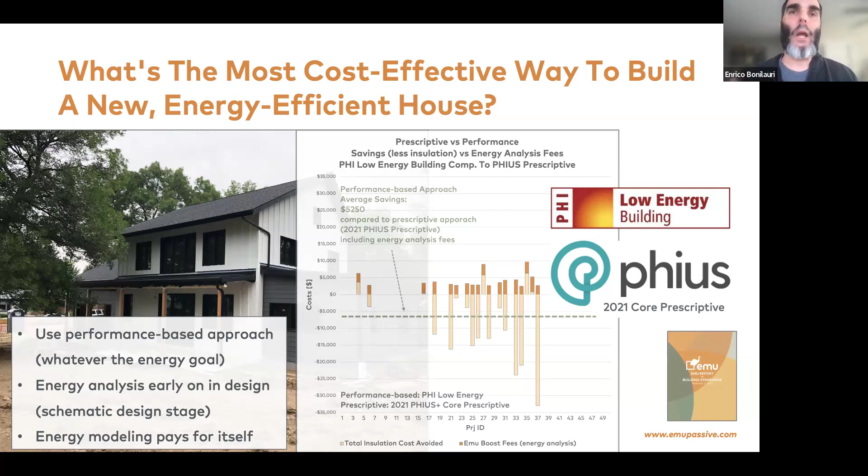This is also covered in the report, there's a QR code for that at the end. But it was very informative, because our market is based on many decisions that are prescriptive. Oh, there's a checklist, I'm going to follow that, without really questioning where the information comes from.

For the retrofit, on the other hand, our recommendation is to start off with an energy audit and then prioritize the building envelope, because that is the way to prioritize health and comfort as well as energy savings.

And then if you can, do a step-by-step retrofit, meaning, hey, your roof needs attention. I literally had this conversation with a client yesterday. Their roof was leaky, so they had to do something at the roof anyway. This is the time to build that roof to a passive house or EnerPHit level, with the proper air barrier, with the proper insulation level, having the vision of the whole building, how it's going to work together. And then windows and walls, they're not going to do it now, they're going to do it 5 or 10 years down the line.

And then prioritize things that need to be fixed. But once you get to fixing them, just do it right and keep that overall end goal in mind.

Keeping that end goal in mind keeps you from having issues like this, where the existing building had no mold and they did a partial retrofit, and the building filled up with mold because they were not controlling moisture properly.

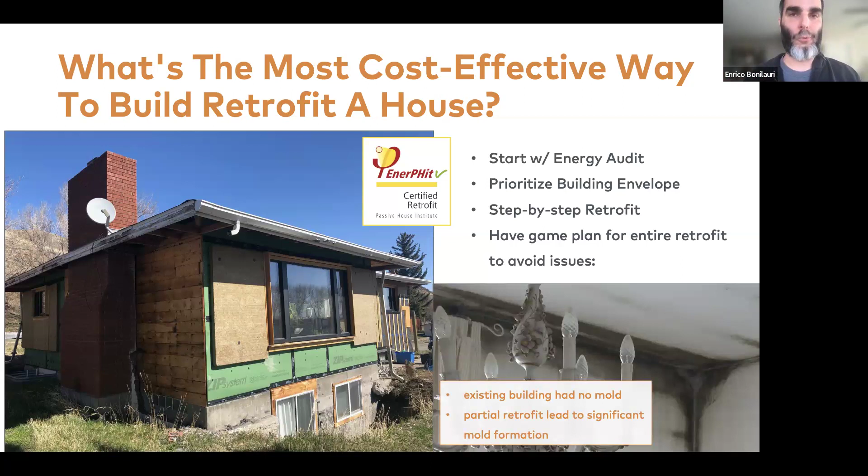So with all of this, where do we land? This is the source energy, averaged for all building standards that we considered. And what we found is that it takes the same amount of energy to build and operate a new house with the 2018 code, or to have a passive house and charge 2 electric vehicles at home.

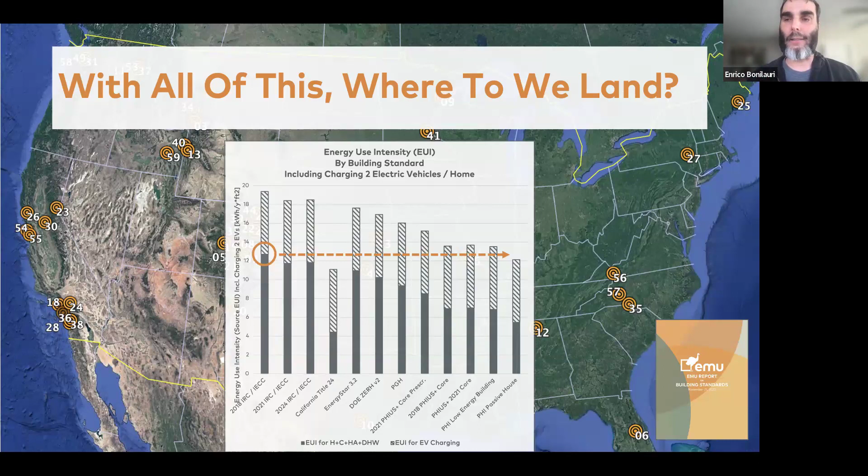So looking at 5 years from now, 10 years from now, the market is going to be very different, but investing in the efficiency of the building envelope today is the way to move forward and keep our buildings up to speed with the times.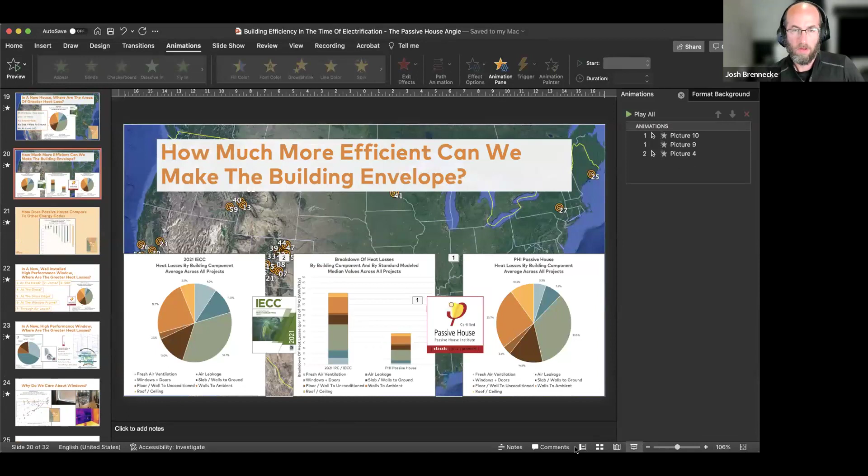That's for the percentage over the passive house breakdown. I'm going to pull this up — this is not Phius, this is for the international standard, but I'll show you because there was actually a question. Josh, feel free to unmute yourself. If you can see the slide, the pie chart on the right is the percentages for total losses in a passive house. To compare passive house to code, look at the graph in the middle.

The green part of the graph is the losses to the windows — this doesn't account for passive solar gains, just heat losses. But going from code minimum windows in the column chart to the passive house windows, the passive house window losses are less than half of those in the code build. So if you want to compare losses, look at the graph in the middle.

I'm just surprised the percentages didn't change more, because oftentimes windows are an R3 or R2.5 or R2, and then you go to a passive house certified window where the complete unit is like R7.5 or R8. You'd think the distribution of percentages would be greater because of that wild swing, the doubling of the R factor.

Yep, I was surprised myself — I was like, oh wow, the absolute numbers, the column chart, is a lot lower, but the breakdown percentages are very similar. About a third of the whole losses are through the windows. What's not shown here for the passive house part is the passive solar gains.

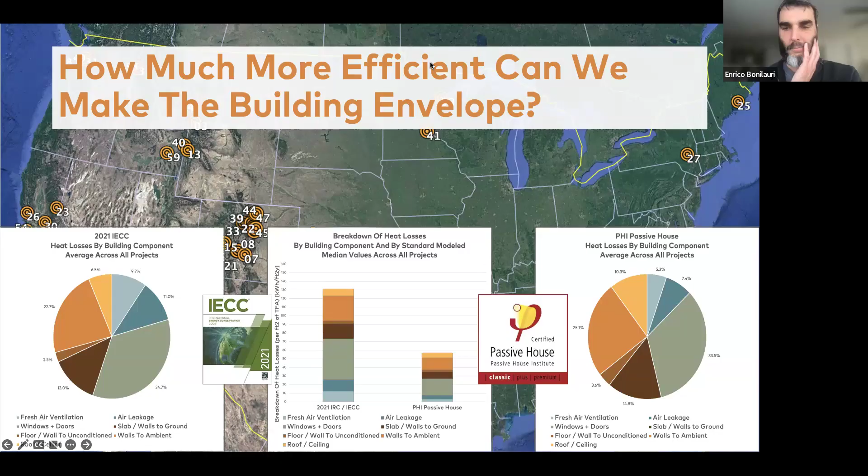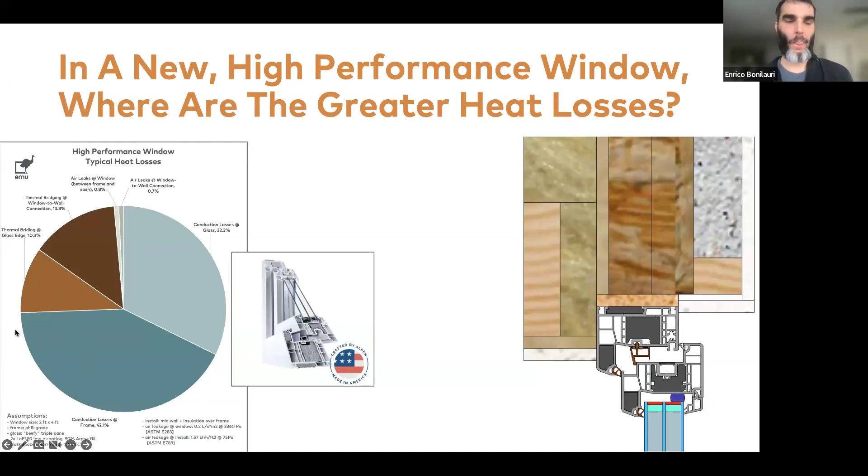That was interesting, because I was trying to understand the thermal bridging at the window to wall connection - where that was happening, and whether that was spray foam.

Thermal bridging is a fun thing - I've been doing this type of analysis for 12 years. Thermal bridging happens whenever you have different R-values, like your glass R-value and your frame R-value. Whenever you have a connection of two different R-values, there is some thermal bridging. This is very evident here for the glass - you see the little arrows. Let's jump into the glass, bypassing the high performance space and the cavity, jumping it to the outside like this. We're kind of stuck because our way of building glass units doesn't ever solve that. Vacuum glass units, which I'm not addressing in this presentation but we're doing research on, are even worse. So this is that bypass effect at the glass.

Now for the wall-to-window connection, at the end of the day we have a certain level of beefiness, say 10 inches, and a certain level of beefiness here, say 4 inches. If I think of isotherms - lines with the same temperature - inside is warm, so my isotherms look like this, and outside is cold, so my isotherms look like this. At the end of the day, the isotherms of the wall need to connect to the cousin isotherms of the frame and the cousin isotherms of the glass, because that's what we're doing. The more of a bottleneck effect you have, the more you constrain this, the more thermal bridging you have anyway. Does that make sense as a big picture?

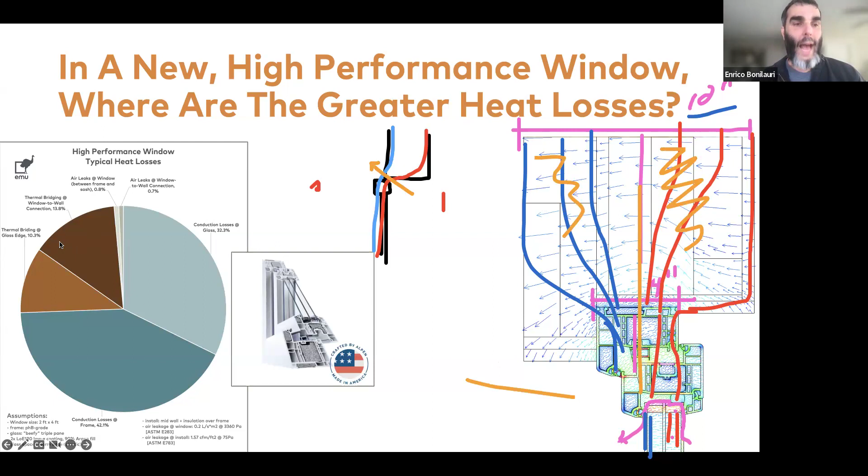That is one of the main reasons why we typically have the install in the middle of the wall insulation. In this wall, we have some R value on the inside of the framing and some R value on the outside. That is why, in trying to have the isotherms have as easy and straight a path as we can, we center the window in the middle of the insulation. Make sense?

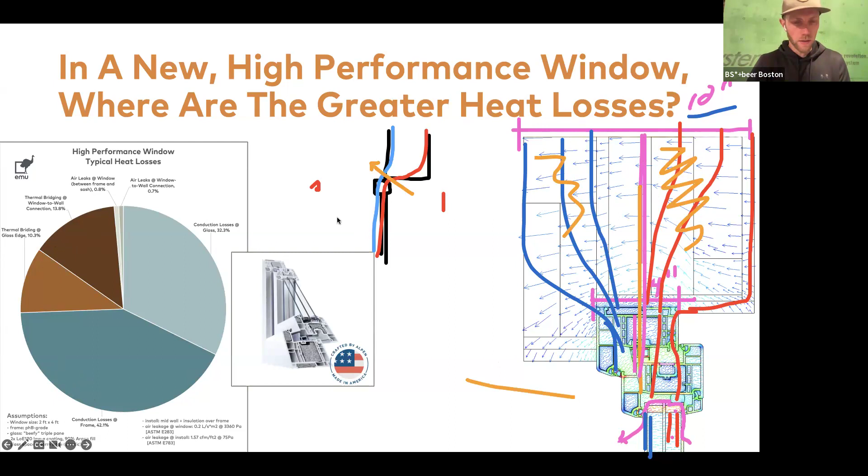On the EMU YouTube channel, there's at least one good video showing the isotherms and the different thicknesses of exterior insulation, straightening out those isotherms. Yeah, it's good. I didn't know anything about that before, never thought about it, and it was a good visual demonstration of what you're trying to achieve and how to think about it, without being in an isotherm software.

We don't necessarily recommend learning THERM and whatnot, just looking at these best practices as a way to move forward, because the same wall and the same window, if you push your window all the way out with a nail flange install, you lose a lot of performance, but you've still paid that money. So if you're going to a higher performance level with your window package and your wall package, which you probably need for comfort and indoor air quality, then you also want to look at better ways to install a window and optimize that package.